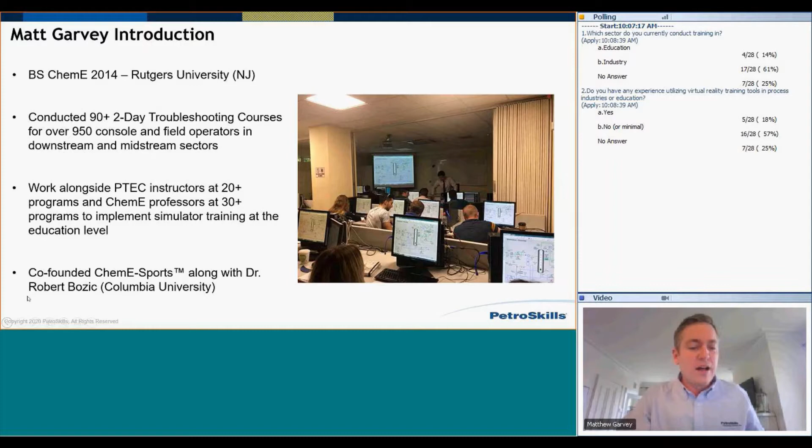And this past year, we had 34 teams compete. We actually had a team from Sri Lanka win. The year previous, it was a team from Nigeria. And the year before that, it was a Louisiana team - schools like Texas A&M, University of Virginia, and then kind of around the world. I'll talk about that ChemE-Sports experience a bit when I talk about how we can build some of this into more interactive exercises.

But just to round out the background on our group, what we focus on is operator training using 3 parts. What I'll focus more on is this actual VR part. Historically, my background, I did console operator training. We worked with a DCS. Well, more and more the last 3 to 4 years, we've been using different virtual reality systems.

Again, I actually produced the DCS. So I almost look at it more as a client when I look at virtual reality, because this is not things that I produce. So I've worked with different systems, and I think I have more perhaps your standpoint when evaluating these systems, where I actually produce the DCS for the simulator.

In addition to that, we have a methodology. I won't go in much detail about that other than to give us a framework to talk about what types of training we could do. So again, I'll talk about our simulator, our methodology, but you'll see very quickly, it's very similar to probably whatever simulation you're using, if any.

And the methodology, I'm sure, is very similar to the type of framework you have for your operator training. In fact, the 5 steps of process operator training I'm going to talk about are identification. And what I'm going to do is relate where VR is at these 5 steps. So identification is when you first have an operator coming on board - okay, where's all the equipment? What's its purpose? How do we relate a P&ID, a console perhaps, in the actual field?

Normal operations - okay, how do we expect things to respond? Maybe it's how do we follow a standard procedure for swapping pumps. Startup and shutdown, self-explanatory. And then, of course, troubleshooting is the big one. And then we also group in - not everyone includes this in their overall methodology - what we call operating strategies or optimization, kind of what are the limits of our different pieces of equipment, how do we maintain product quality, different types of this, and it starts to get system dependent.

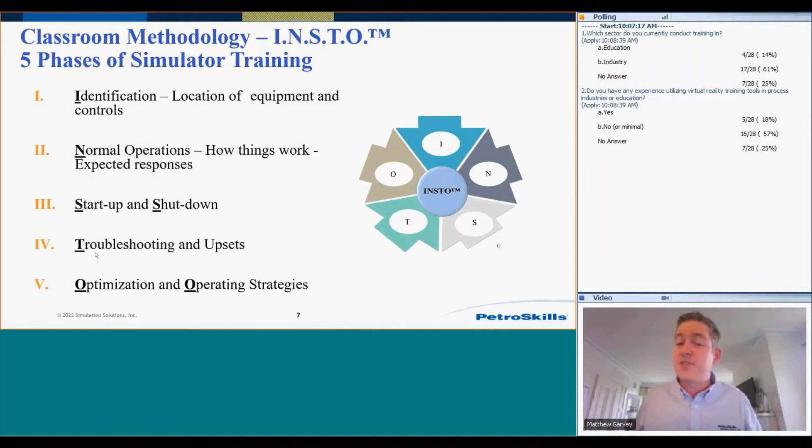Just the last slide I'll give on our general methodology, and I do think this is important, and it applies to our virtual training as well.

When we approach operator training, our main objective in any content we develop, deliver, or advise potential clients on is really teaching operators how to think.

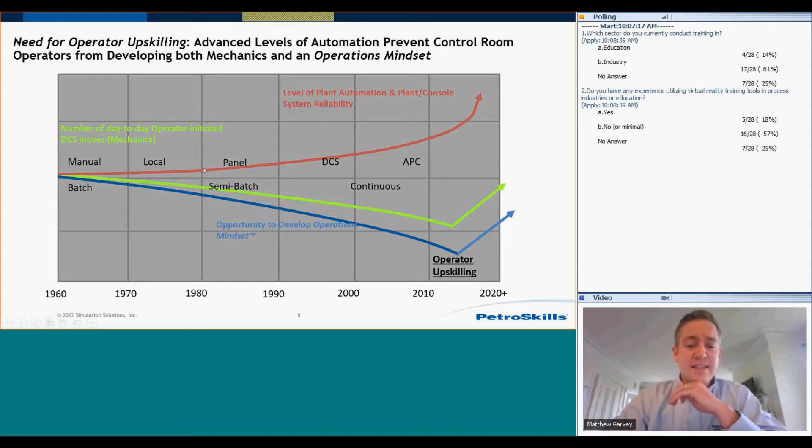I like to show this slide here, looking at the industry. I'll use a downstream example, but I think it's analogous across chemical process industries. The actual technologies, for the most part, have gotten to a certain point where distillation is distillation, catalytic cracking is catalytic cracking. The actual advancements now, expansion projects, are mainly to deal with environmental concerns and things like this. The actual processes aren't changing all that much.

What's truly changing is the advanced process control, and it seems there really is no end in sight for this. And that's a good thing, right? It makes our plants more reliable, safer, more efficient.

But as we get into this world of advanced process control, what we see working with these operators day to day is they can feel separated from the process. They might be doing less day-to-day operator-initiated board moves, this green line. And even more importantly, what we're seeing is their time to actually develop this operations mindset, which I'll define in just a moment, is also decreasing.

So when your group has an opportunity to do offline training, which is what we may use virtual reality for, we think it's really important to not only use these tools for things like here's where this piece of equipment is in the plant, here's how you follow the standard procedure, but leverage these tools to start getting operators to think about why they're doing what they're doing.

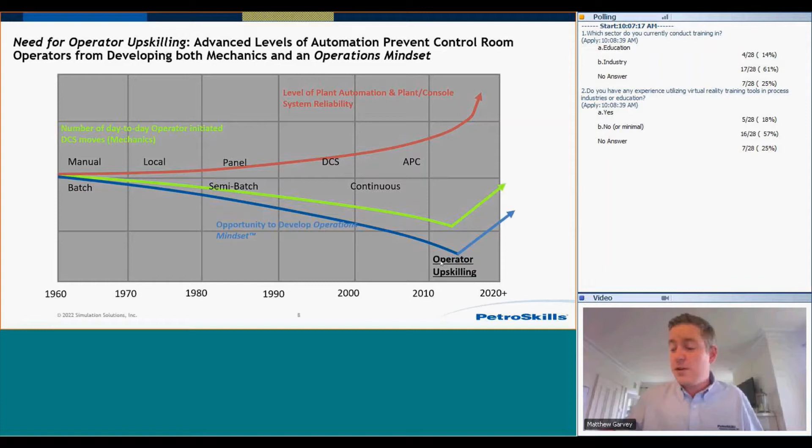I really believe there's an opportunity here for what we call operator upskilling, but your site might call it something else. This is the mindset of the operator. We believe virtual reality could really be utilized for this type of skill set.

So just to define those a bit further - mechanics, what are we talking about? Both mechanics and mindset are important; we're not saying you only need to focus on the mindset. But these are things like ability to work within operating procedures. You give a field operator a procedure for how you are going to switch from pump A to pump B, and they can complete that procedure as it's written. They can stay within the operations limits.

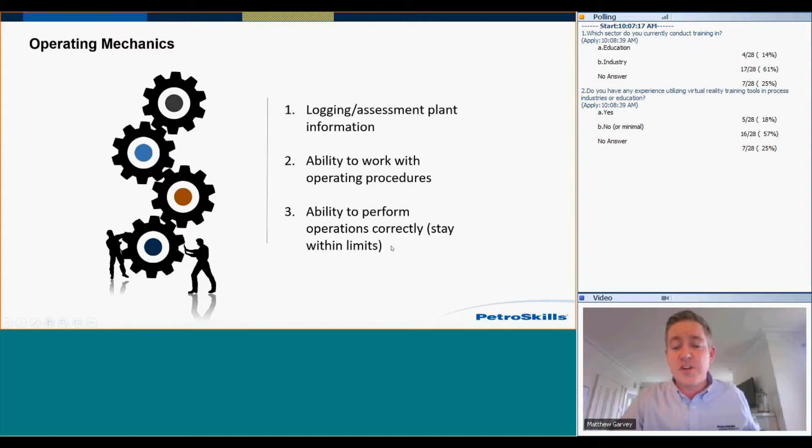But when we look at mindset, this is a higher level skill. This is the ability to analyze reasons for events and upsets. So you're swinging pump A to B, and now something deviates from the procedure a bit - are you just blatantly following step 1, 2, 3, 4 with your head down? Or do you have an expectation of results as you're moving? Do you have an ability to prioritize and deal with events and their causes, and to gather extra information to determine magnitudes of upsets?

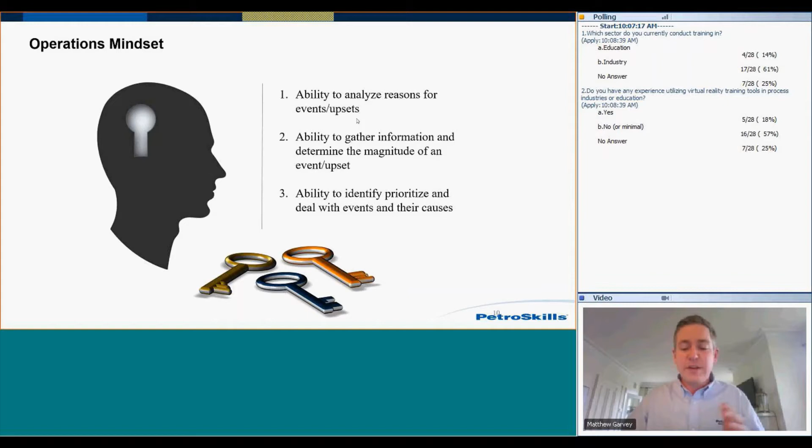We believe if you apply both of these, and approach the training with these tools for the mindset as well, operators can stay proactive. They're developing both this mechanic and mindset skill. What we tell operators, not as a joke, is: you are running the plant - that's where you want to be. If you're simply reactive, just applying exactly what's provided to you, you could be caught behind the plant, and it's a constant struggle. So we're trying to promote skills that are really about how operators think.

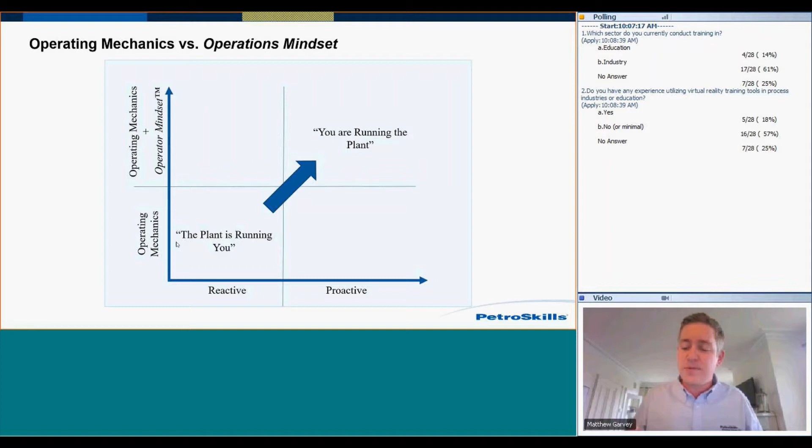And I think there's a great opportunity to do this with some of the virtual training out there. So that's just a bit of background. Here's my summation - I'll really just talk about one slide here about what I see as current status. And I see there's some really, really cool training out there.

What I think is the current utilization of virtual reality—and this isn't for every operating company in the world—is that VR tools do a very good job at these first 3 steps we've defined. For identification, there are vendors out there taking 3D cameras of your site, tagging every piece of equipment, and then an operator can go in with Oculus glasses and be given a task, like go find valve FCV 103. The operator can relate it to a P&ID, go there, and physically see exactly what that valve is. That's extremely powerful, and a great application for virtual reality.

What we'll see as well is things that are procedural, like startup and shutdown, which I'll group together. For example, we're going to work on this section of the plant startup: turn this valve X amount, block this in, go ahead and start the P120B motor. It's very procedural, and very valuable because when the operator goes into the field, they've already seen this equipment before, limiting the amount of error for things like identifying an incorrect piece of equipment.

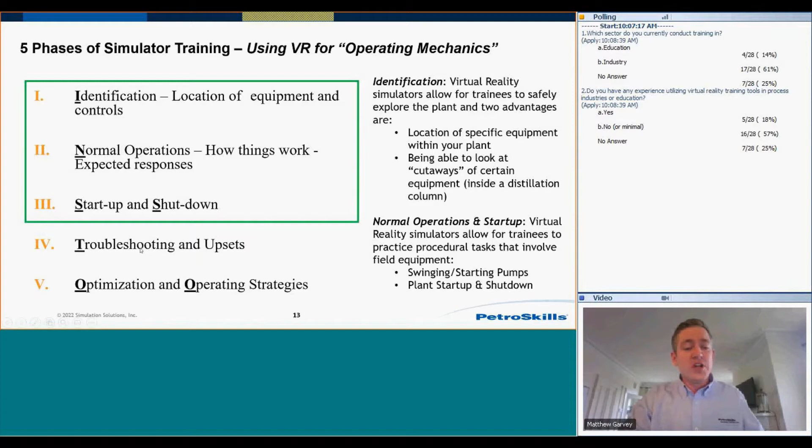To summarize, currently what I see with virtual reality is a very strong application for those using it—it could certainly justify the cost for identification, normal operations, and things like startup and shutdown, very procedural areas. What I want to do now is more calmly walk through where we think you can apply some of these tools for things like troubleshooting and upset conditions.

What I'll do is actually go ahead and launch one version. The purpose of this workshop is not to just show one certain process simulator—I truly believe, as I go through this and launch it, that you could apply these different techniques to any simulator you might currently be using. It's just the one that I can currently use.

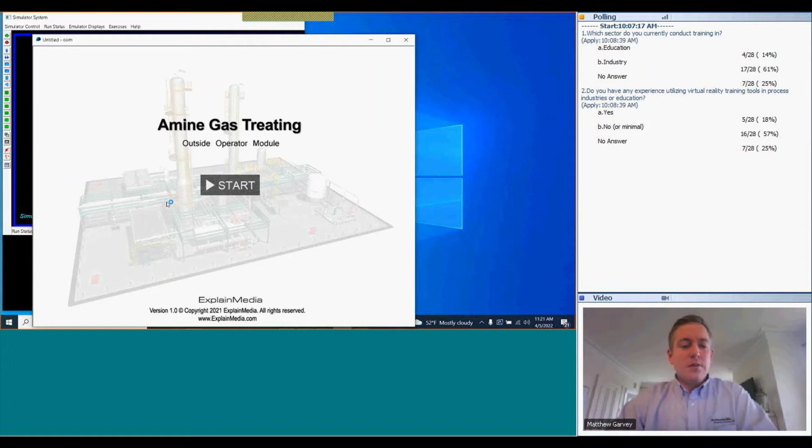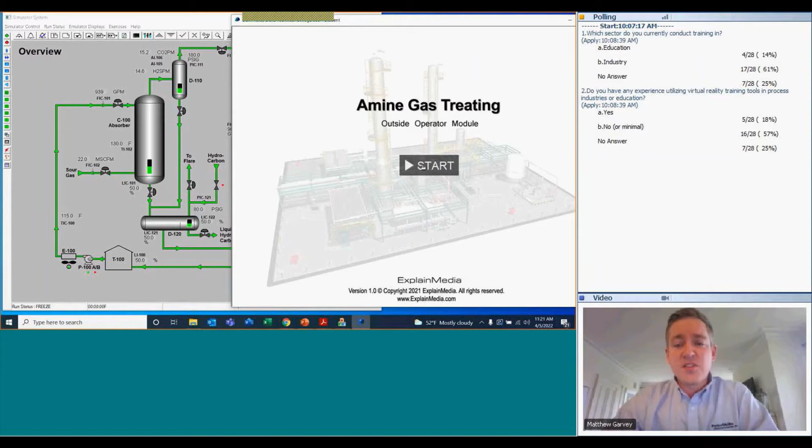So what I'm going to do is go ahead with a simple absorber and stripper process here. This I'll call the DCS, Distributed Control System, and this is what I'm currently calling our VR outside operator. A couple notes: right now I am running both of these windows from the same PC, and I'm not using any sort of virtual reality goggles—this is all standard PC-based.

These are the same types of troubleshooting exercises that I think could be even enhanced. Number one, which is the big one, is using the same system on 2 different machines—that way you have team training, with 2 different students or operators in 2 different locations working on the same dynamic process. I'm not showing that right now since I can only show 1 computer, but I think that's a big benefit and something you should keep in mind.

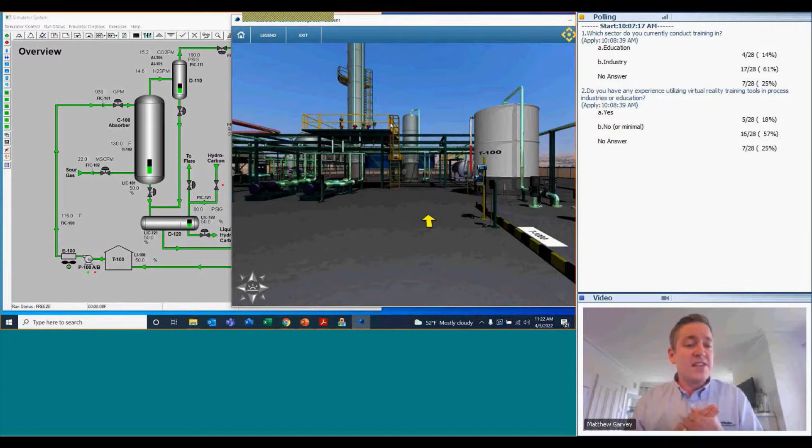And then the other aspect is as we start to get into more advanced technologies. So this right here—I'll make this one full screen—this is our virtual plant, right?

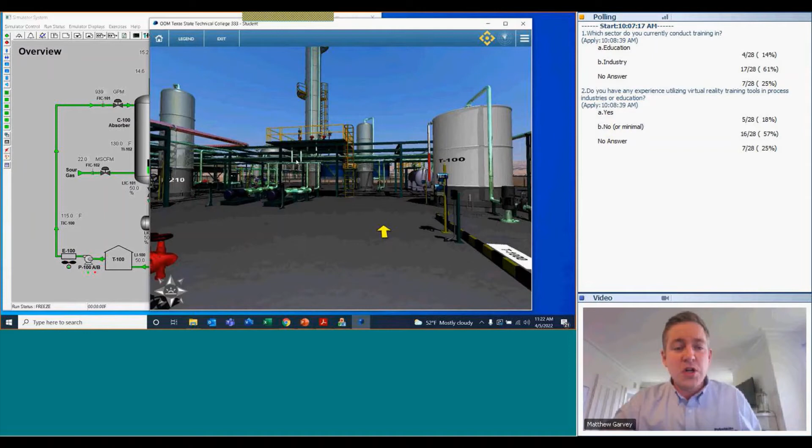We can see our absorber and our stripper, and we can walk around and take a 360 view. In the previous slide, when we talked about identification, we could come look inside the absorber to see what it looks like. We could go ahead and do a procedure where we start up pumps.

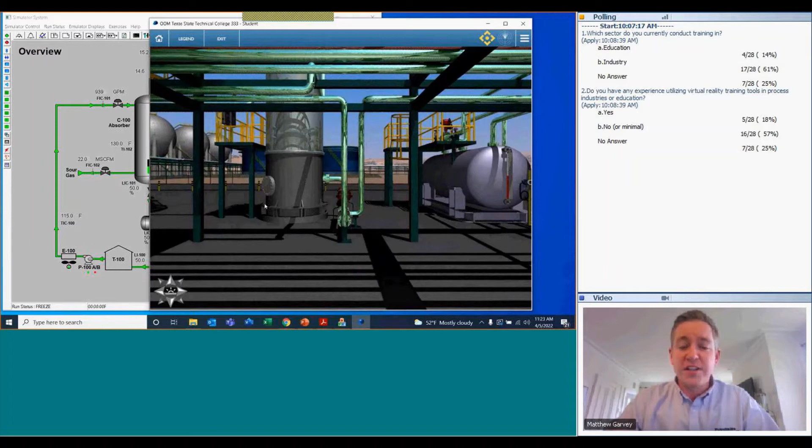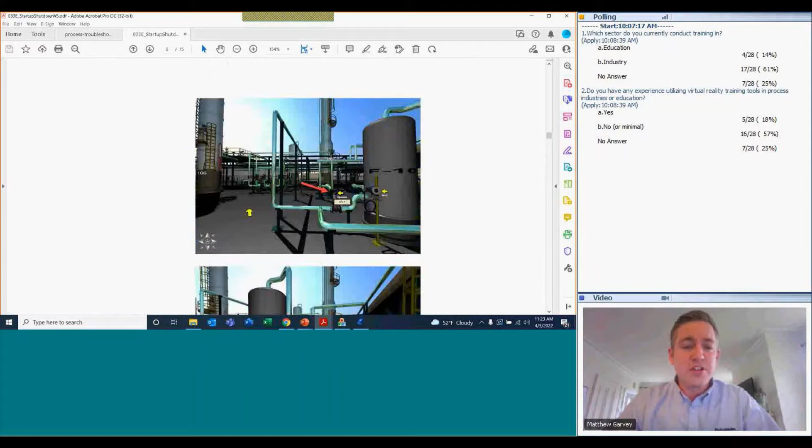Because I have 45 minutes of your time, I'm not going to go through those. I'm going to go through what I think is more interesting with the troubleshooting. But just to give you an example, you can imagine a situation as I come through the system where you're conducting team startup, and that would look something like this. I'll just pull up what we do, and go to a random part in this startup procedure. This is good, where you're going to begin certain circulation in the process.

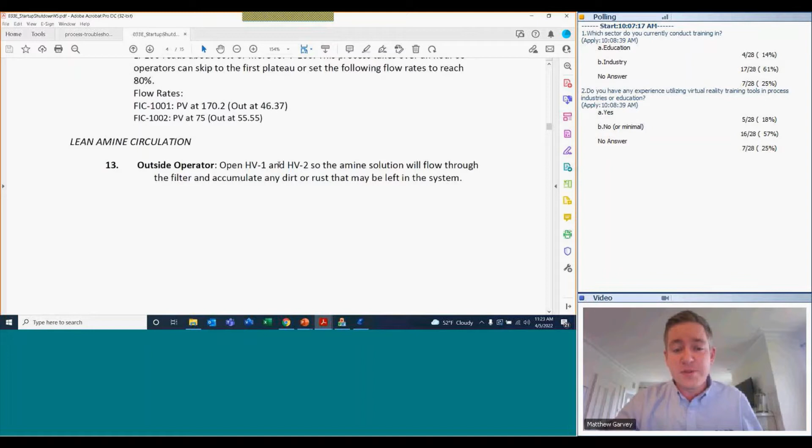The key thing I'm trying to show here is there's functions for the outside operator using the VR. So they're opening some sort of valving. They can go in the field, actually find that valving, begin to open it. And then the console operator at the same time is working things from the DCS. I see this as a strong application from most of the VR that's out there right now. So right here, we're already attacking the team training, which of course, startup is a team exercise.

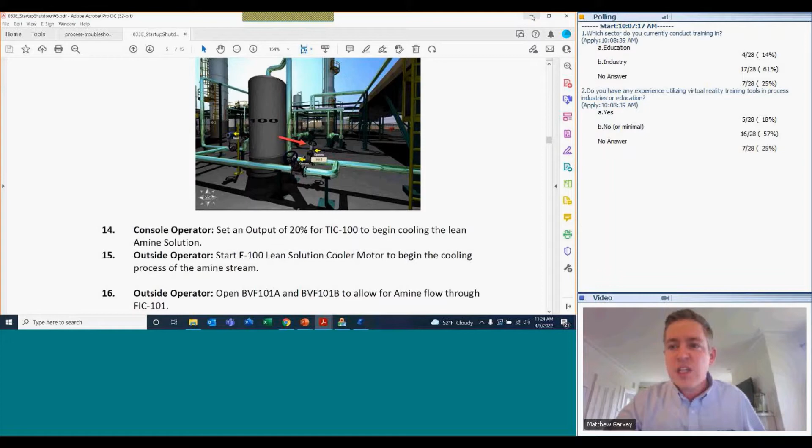I'm not going to focus on this so much because I think people are doing a good job with it already. What I want to focus on, and I'll slowly use this system to walk around to a specific piece of equipment when we do some of this troubleshooting, is I want to go ahead and just show you maybe 2 exercises. The focus I'm going to put here regarding troubleshooting is how do you incorporate that virtual piece?

Sometimes what I'll see, and I'm not saying everyone does this, is an investment in virtual reality at the education level. It's a very neat thing to attract students to the program. Students go in for a lesson, they're able to walk around and say, oh wow, that's what a distillation column looks like. And that is powerful. But after that initial kind of wow factor, maybe they put the goggles on and now they're looking at a pump system.

Or at the plant, perhaps your outside operators during their onboarding program, you can more efficiently identify the process to them, convey where equipment is. But again, do you still use that tool as you're going through more of your developmental training? So what I'm going to focus on is, I know a lot of people use process simulators, so more the DCS to conduct troubleshooting and things like this. Let's talk about how you can meaningfully utilize the VR there as well.

So just to use one example for this, to start, I'm just going to show this is just one of our troubleshooting styles of exercises, and I could talk for quite a bit on this, but instead I'll focus how we use the outside operator. So this is something we'll go through the troubleshooting course. We call it a troubleshooting methodology.

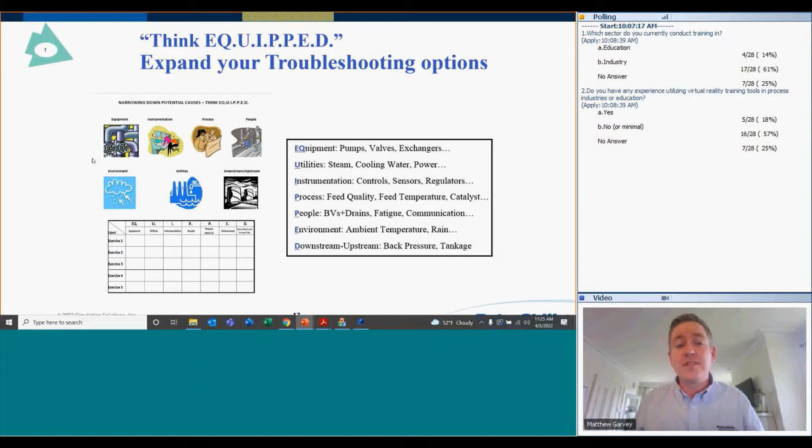We call it Think Equipped, and the idea is that Equipped is an acronym. If I go to the next slide, you can see it in a fishbone diagram. What we do with console and field operators is we'll put in short little upsets into the simulator and say, okay, don't worry about fixing the issue right now. We want to practice the skill of troubleshooting. So what we want you to do is actually go through these specific categories, and I'll show you what the worksheet looks like in a second.

We want you to go through, use equipment, utilities, process, etc. And we just want you to identify 3 to 5 to 7 potential bad actors. So what are the potential reasons for this failure you're seeing? Instead of just approaching it where the operator comes on the simulator, something breaks and they just have to scramble to try to fix it, we try to break troubleshooting into its parts. We say, don't worry about fixing anything right now. Let's just practice that skill of developing a list of potential failures. And then, of course, we'll eventually get to the corrective steps and identifying and putting it all together.

I think this is a great style of exercise to start working VR in, and it's something I've done the last couple of years here. So I'm going to go through a sample exercise, but I do want to show the worksheet. Then what I'll really highlight is where we can use the outside operator, and give you some of our evolution on how I've done this, because talking about how I've integrated VR will give you an idea of how you can too.

Previously, what we would do is put a failure in the system. I'll show one in a second. We just had these steps 1, 2, and 4. I'll try to make that clear here, where the operator, the trainee, the student goes in and writes down a few observations about what they see changing in the system.

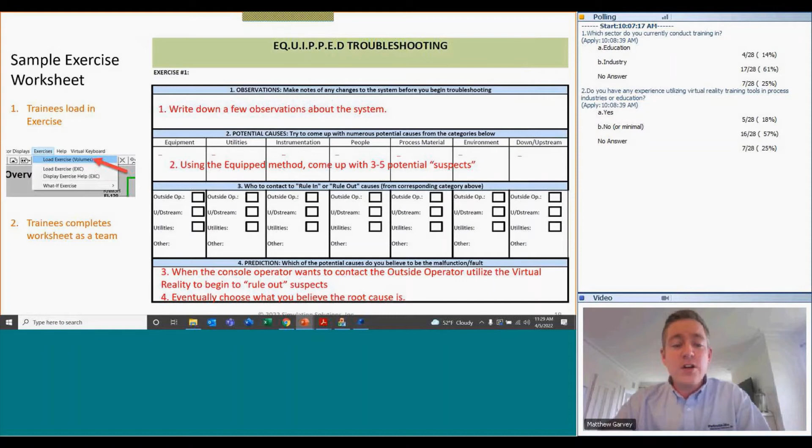So this is one example of how we did it, and I can just show perhaps an exercise would be better than just a bunch of slides. I'll show an example I took from an actual class and some of the feedback we got.

The way the trainees would do this is they would load in an exercise—I'll call it think equip number 1. They'd go through quite a number of these, and I'm going to turn off my alarms... oh good, already off. The point of this is that very quickly something begins to fail.

You've all looked at the system maybe on my screen for a total of 30 seconds now, so of course I don't really have time to walk through it, but you can see there's an alarm here, right? It looks like there's an alarm, looks like a feed flow issue. If I move forward on the graphic, we can see a little more clearly here.

This is our lean amine absorber—basically an amine gas treating unit. We're bringing in a lean amine solution here, bringing in sour gas, and the overall goal is to absorb most of the H2S or CO2 from the sour gas. Then of course we have a stripper on the back end to clean it up.

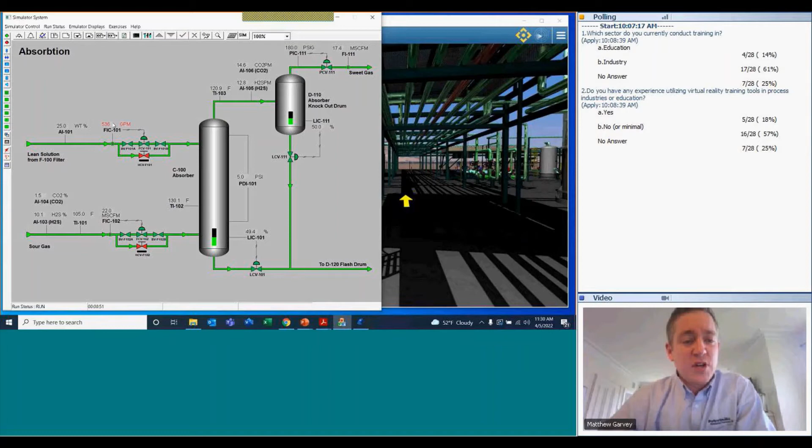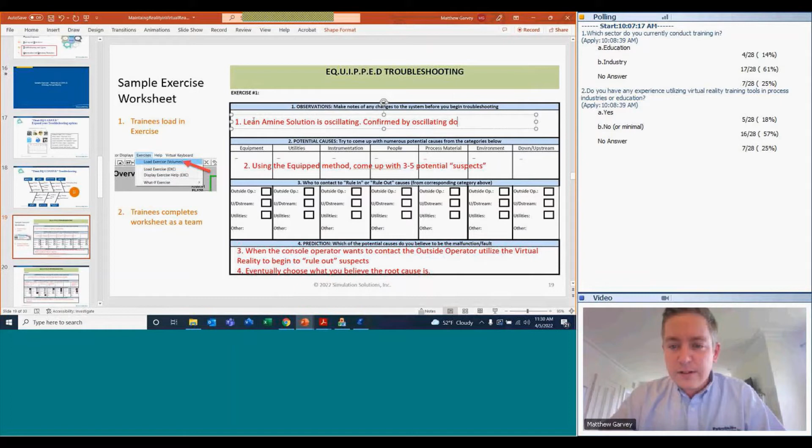Without going too in depth, where we'd start this exercise is the console operator would start to identify what he or she sees. The idea is they'd be filling out a written worksheet—I have an answer key, but I can show it dynamically. They'd note, the lean amine solution is oscillating. Normally I'd ask the audience to answer these, but it's confirmed by oscillating downstream variables. What do I mean by that?

Very quickly, this seems to be oscillating. Let's just pick any old variable, temperature. There also seems to be some disturbance here, right?

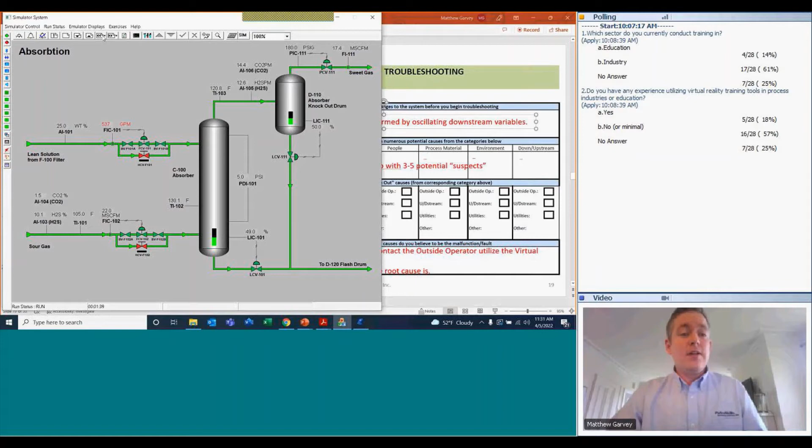So we truly believe that flow begins to oscillate. Now what we do in two parts: we say, okay, console operator, take out your P&ID. What is the different equipment that you would like to begin thinking could be a bad actor here? I'll pull up results from a class we've had before.

What we'll see is they'll rather quickly talk about it, and the point isn't the tricky part there. Experienced console operators, or people getting it quickly, will be able to fill this out rather quickly. They'll talk about, well, perhaps it could be the control valve, there's a pump upstream perhaps that's cavitating, there's a filter system, filter clogged.

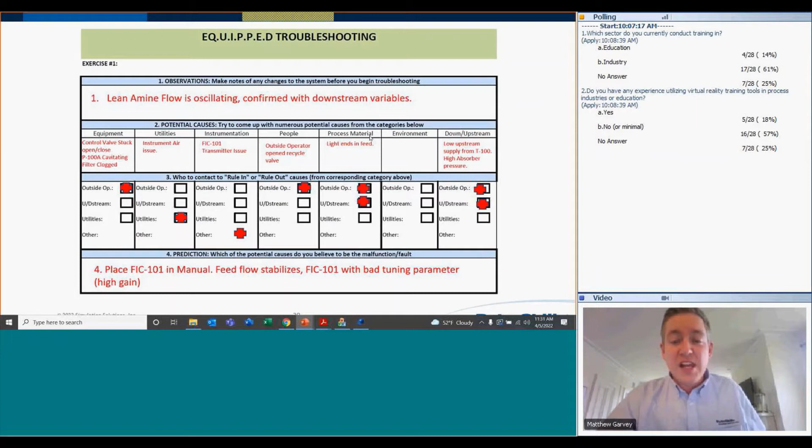And here's the key thing: we say, okay, who are you going to contact? Well, the outside operator. In the past for this exercise, there was no outside operator, it was just, okay, we'll contact him or her, and then we'll keep moving along here. Maybe it's an instrument air issue. Maybe there's light ends in your feedstock causing that pump to cavitate. Maybe you have low upstream supply from T100, right?

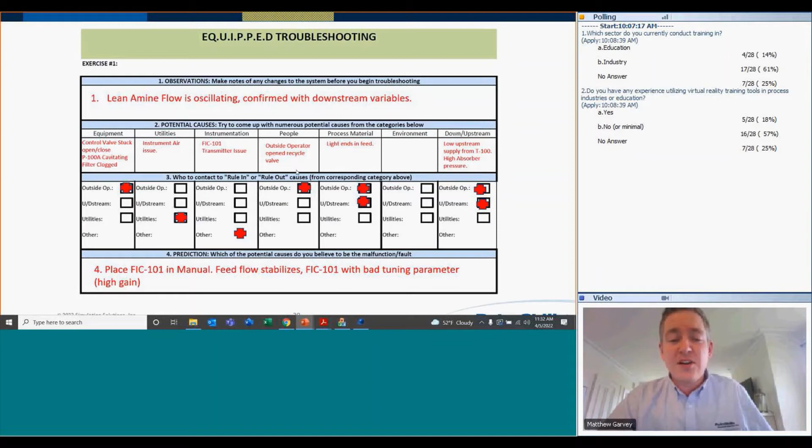So let's just focus on that one, and then I can show you the next one. So who would you contact? Outside operator is going to be in a lot of these categories, it's going to be the outside operator. Now what you have, we'll do it over radios, we'll try to get people in a different room.

But okay, we've gone through eight minutes. The console operators identified things. While they're doing this, they are now calling the outside operator who's on his or her simulator with the VR, and let's just focus on maybe we think this is oscillating because our pump here, P100, is cavitating.

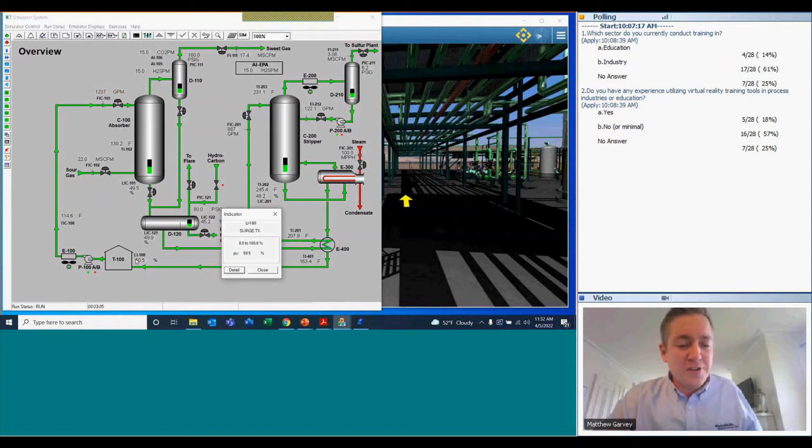And why is that? Maybe we have low supply in T100. We see LI100 here, so we get from the board an indication that the level, it's not low, but it gives us a good opportunity to say, okay, let's start checking variables. If some of you in the webinar today are more operations focused, you're probably going, that's not the most realistic thing, there's probably other stuff you want to troubleshoot.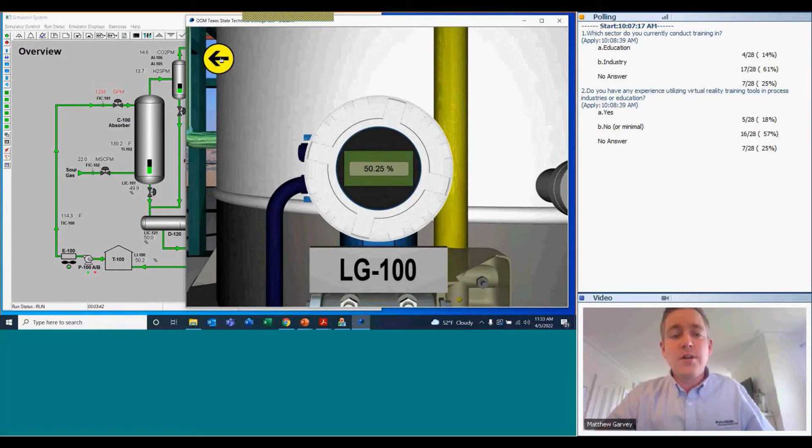So the outside operator, here's that T100. Again, we've gone through all the identification exercise, so they're familiar with the system. But now imagine a communication system where they can both check a sight gauge and eventually go, okay, no, the levels match up with what you see on the console. Okay, check it off, let's keep working through our list, right?

So eventually what they might get to is, okay, we might want to check the pump status, so we could go check the amps on the pumps and different things like this. But what I'll do instead is just jump, let's go check the control valve itself. I'm just going to parachute in because it'll be faster for the demo—they'd be walking around. So what we're looking at now is our filter.

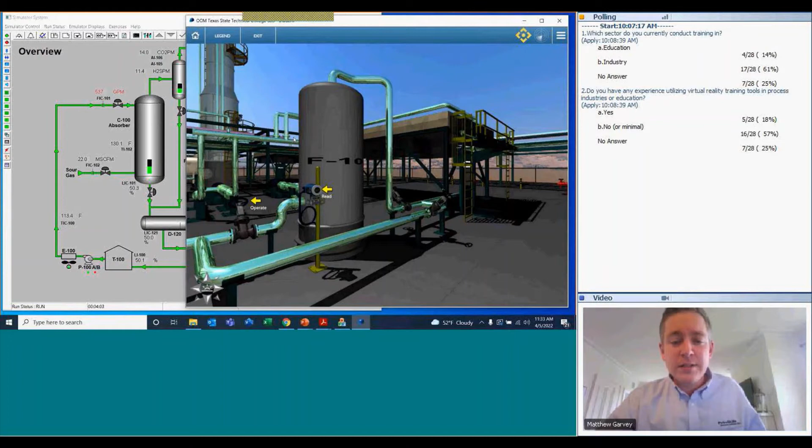And here's our control valve. So now what the outside operator can do is actually go ahead and look at the control valve, and they can come in and see that the valve itself is moving up and down, as well as the air to the valve. So the outside operator can start relaying that information.

If I go this long for a demo in a class, one of the operators is screaming at me, just put the valve in manual already, right? Because they start to deduce what it is. But what I'm trying to show here is it gives us an opportunity where we can put in different instrumentation, both on a DCS as well as in the field, so you can start to build this team troubleshooting.

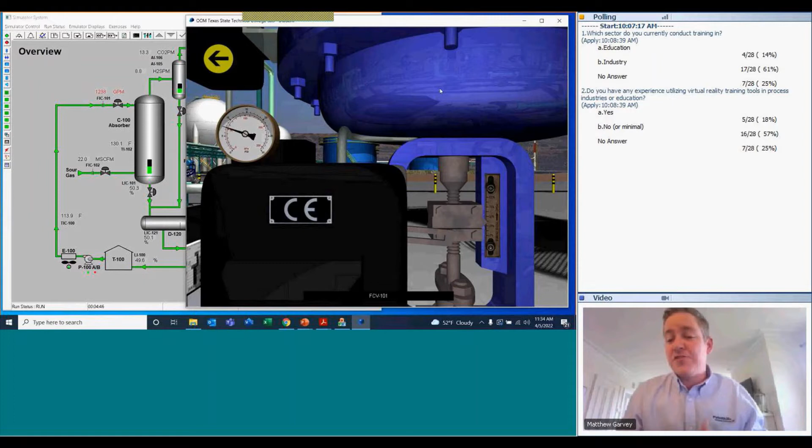And I work with the same pairs throughout. So they're going through and now they're saying, okay, check this piece of equipment. And where we really want to get it to, and where I think it's really powerful, is when the field operator starts contributing information the console operator didn't ask for. I think that's a lot of the training we're getting to: if you can have your field operator using VR start to see more of this troubleshooting process, they may start offering information that the console operator is not asking for that might help get to a solution faster.

Eventually, for corrective steps, if it was an issue with the control valve that couldn't be fixed from the board, the operator can come in and you can kind of see a block valve bypass scheme. Then you could actually follow a procedure, just like the startup, where we're going to block in the control valve, work through the bypass, and get the unit back online.

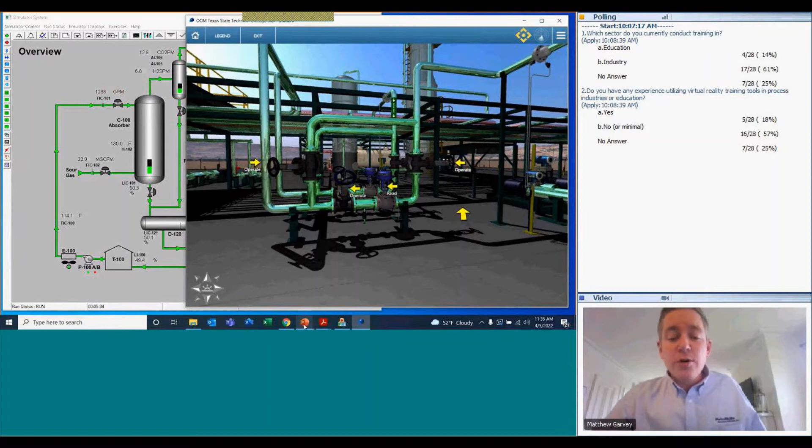The point I'm trying to show isn't just about any one tool. Whatever previous troubleshooting you were doing, whether pen and paper or just a simulator like this, make it team training. Start adding in different tasks for the outside operator to use the virtual reality, and you'll get more and more out of this tool.

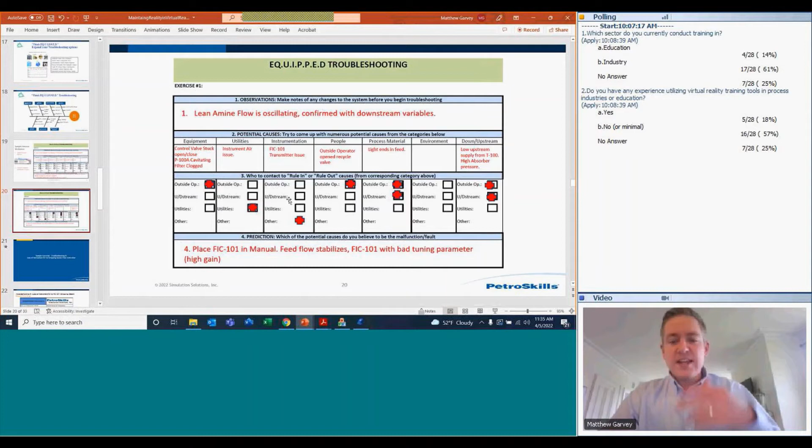We'll go through many scenarios like this, and eventually they could place it in manual and stabilize it. But this Think Equipped exercise has lended itself to VR quite a bit, because it's really about gathering information and weighing potential failures and probability. By having two points for information, that instrumentation duplication between console and field, we've found this helps build team training.

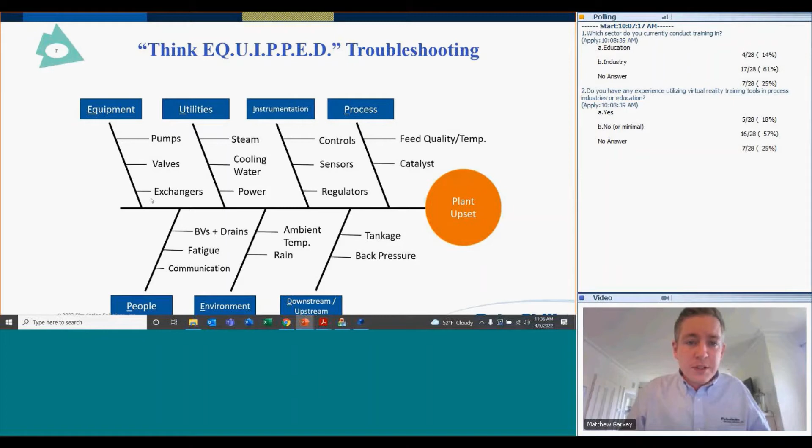Feel free to use any of this, apply it back to your own system if you think something here is catchy or useful for training. And just because of time, I'll show one more example, and then I'll certainly be on time here.

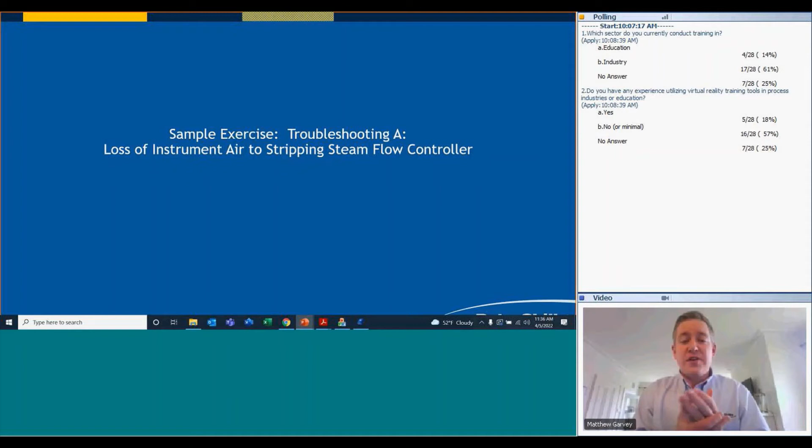What's another way we try to use virtual reality at the operator or education level? I could talk about our methodology for quite a bit, but instead I'll quickly explain this because I want to focus more on how we've modified it to use virtual reality. So here's another type of troubleshooting.

In this one we tell the team the failure upfront. We tell them, okay, we're going to look at a system where you're going to lose instrument air to our stripping steam flow controller, using the same absorber stripper section. You can think of any failure you want to put here.

Before, when we were just doing console training with the DCS, we would tell the console operator - this is almost like a hazard analysis exercise - what steps are you going to take to confirm the issue? How are you going to mitigate it? How can you buy yourself time before the eventual correction, if there is one, outside of a safe shutdown? And how will you eventually correct it?

This one was rather simple to apply to virtual reality. We just asked, what is the outside operator going to do? How are they going to confirm the failure from the field? Applying virtual reality actually becomes simple because it's closer to real life. If you've just used DCS simulation before, it's like suddenly having this extra tool that lets you apply a lot more realism.

From the field, how are you going to confirm it? How are you going to mitigate and correct it? Then, of course, we go through safety concerns and get to an eventual correction step.

To show some of this dynamic process, the teams would fill this out and make their predictions about what they think is going to happen. After that discussion, which isn't my main focus here, they'll actually go apply a fix, working in teams, working with both parts of the plant.

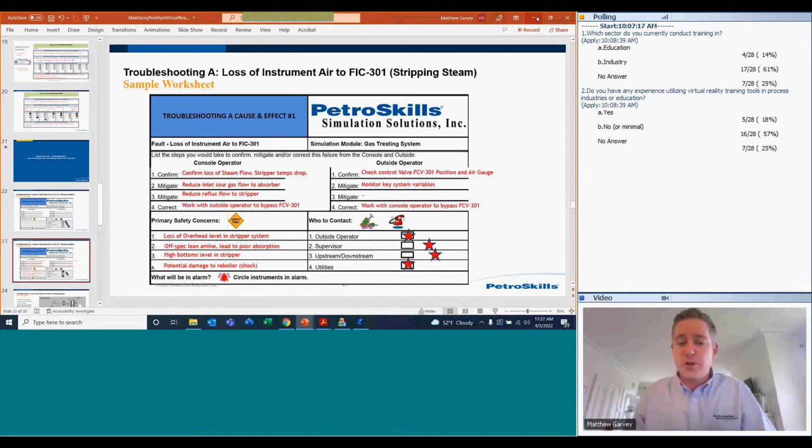The way we'd run this is they'd come in and load in an exercise - loss of air to FIC-301. I'll go to that one in a second here.

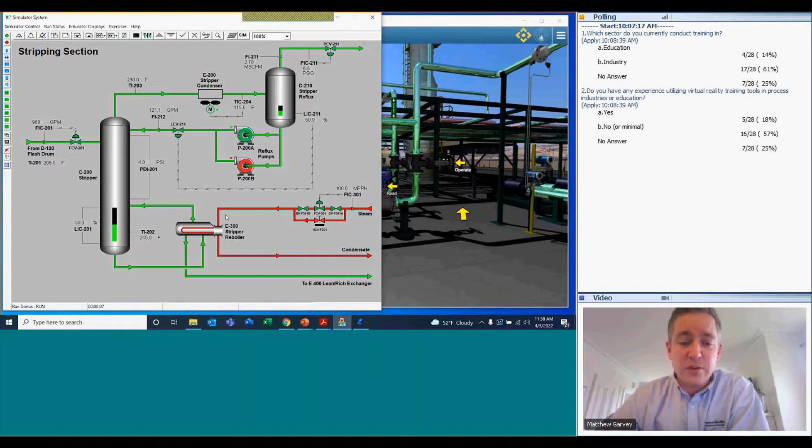I'm just going to skip ahead to our stripping section. So this is our control valve, putting steam down to the reboiler. What's going to happen, I think at the 15-second mark, if not I'll force it to go in, is we're going to lose air to this controller. There we go, okay.

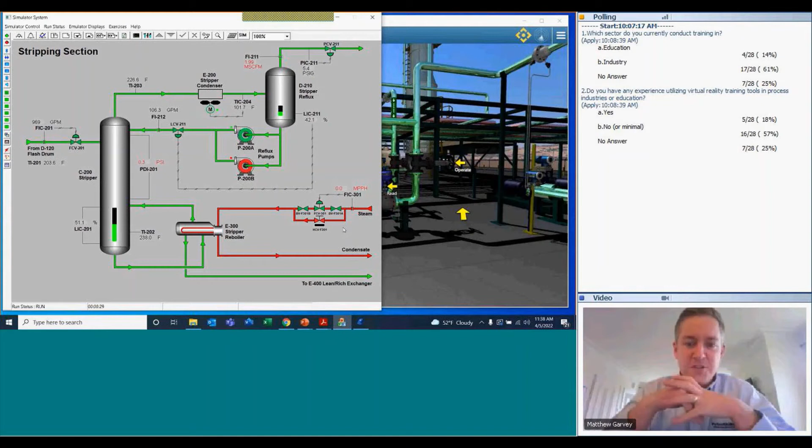So now what we say is, okay, again, it starts with the console operator. This is if you're doing team training. If people want to know, I can talk about how we do it with just outside operators or just console operators. But if we're doing team training, it starts with the console.

Very quickly they realize something's wrong, and now it's, okay, I need you to go check out what's happening over by the stripping steam. So the field operator is familiar with all this. I'm just going to dive in again because I don't want to spend time walking around the plant. There we go.

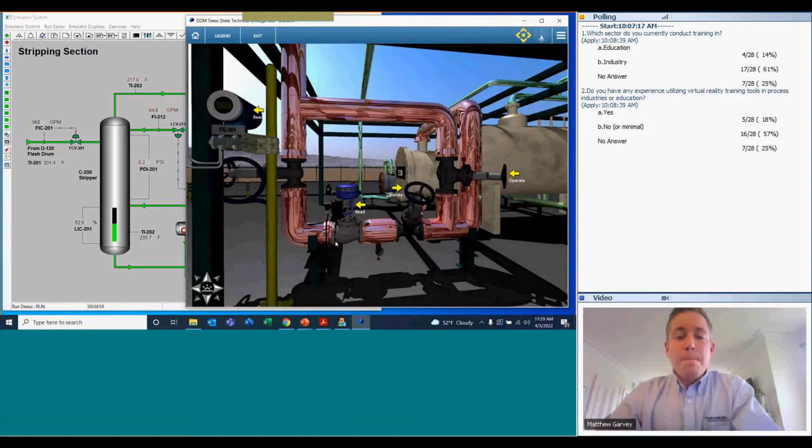Here is the flow gauge associated with my stripping steam, and I can see it truly is 0. So we can rule out that that's a faulty reading from the console.

Now, when we first see this, it doesn't shout out that we lost air to the valve. We know we don't have flow, but we could be thinking it's loss of supply. Maybe the boiler's tripped out. Maybe it's the physical valve failed shut. Maybe it's a bad indicator, like I said.

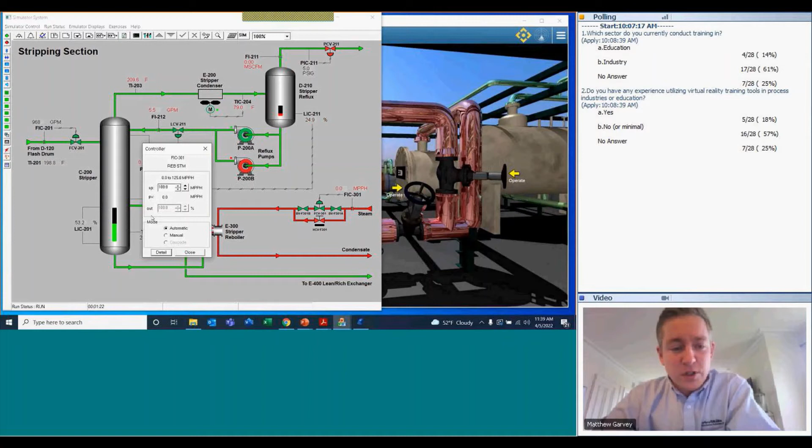And from the console, if you're currently using this, you can see the output signal from the controller to the valve is 100%, but the PV is 0. I could try putting it in manual and changing this, and I'm not getting any flow. So I'm a bit concerned because this green animation here is just from the actual controller output.

So what I want to do is ask my outside operator to go look at the valve. And then, while from the console it looks like the valve's open, from the field, the actual valve position, we can see it's 0 here. And we can see we've lost any sort of air coming to the control valve, so it's in its fail-safe position, or in this case, closed.

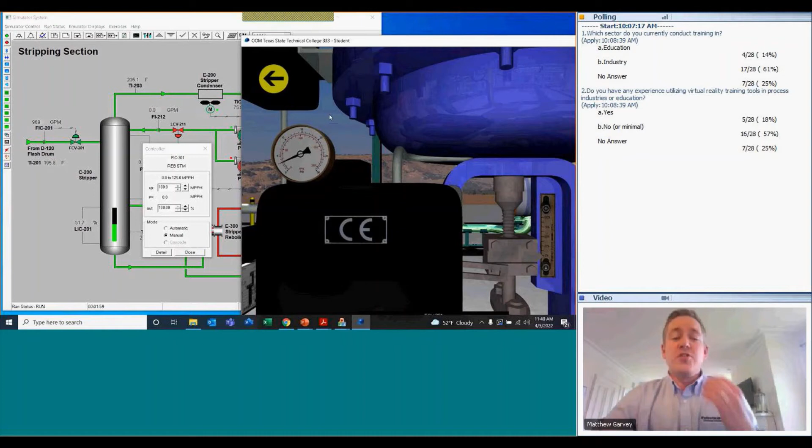So this helps both with the troubleshooting. It allows us the opportunity to look at it and start to analyze the system. But then, of course, I'll just go quickly here, but it allows us a chance where we can actually go ahead and block out that control valve.

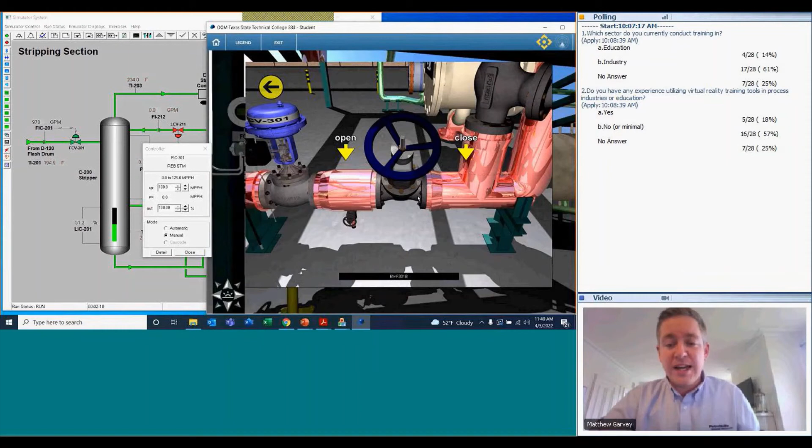Let's go over here so I get both block valves. Yeah, good enough.

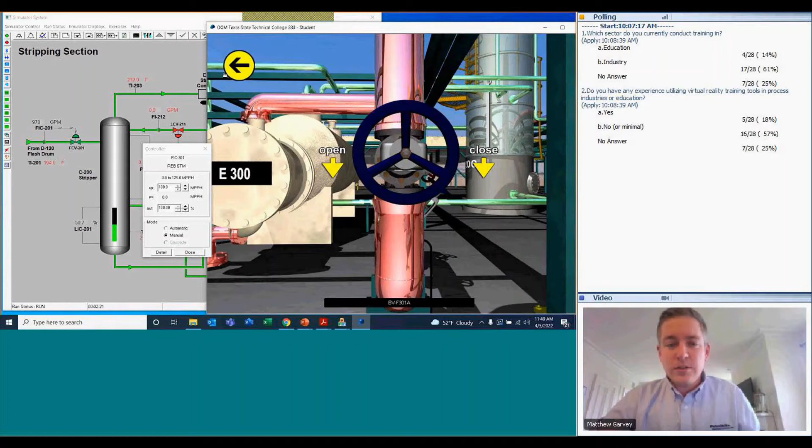And again, following procedure, it would be faster or slower than this. But eventually, imagine a console operator communicating to the field operator about starting to open this bypass, if we can keep the system online. So the outside operator can come in and manipulate valves.

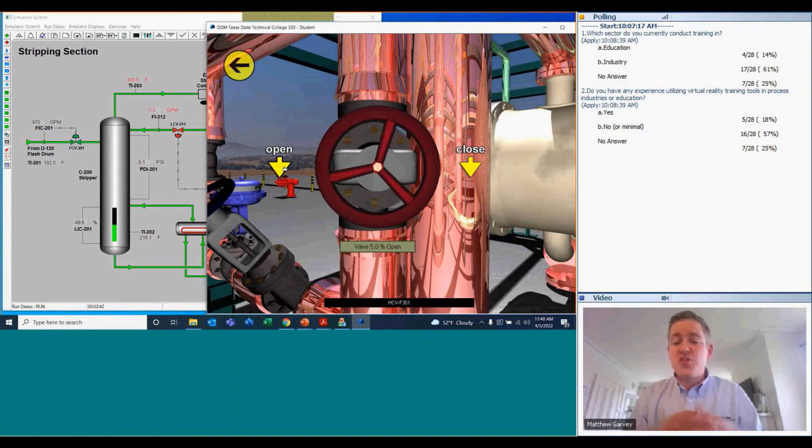Again, I'm doing a PC base. We're clicking things. You might have more advanced technologies where you can actually turn your hands, right? I've seen some cool stuff like that. Same general functionality.

And they can come in and open this, and of course they'd work together as a team. They'd see they reestablish flow. The console operator will probably take the controller, put it in manual, and just shut it, so they're clear that they're working through the bypass.

And then we could talk about eventually how we fix that and who we have to call, and things like that. But again, it's this idea of working between teams. It's the idea of, I bought this tool, or I'm looking to buy this tool, and it's going to be used for BOT training, or it's going to be used for an expansion project, and we're going to be able to show everyone where all the equipment is.

And our argument is, that's great. If that gets the project justified, awesome. But if you still have access to the tool, if you apply some higher-level troubleshooting concepts, some different techniques, you're going to be able to get a lot more out of the tool itself.

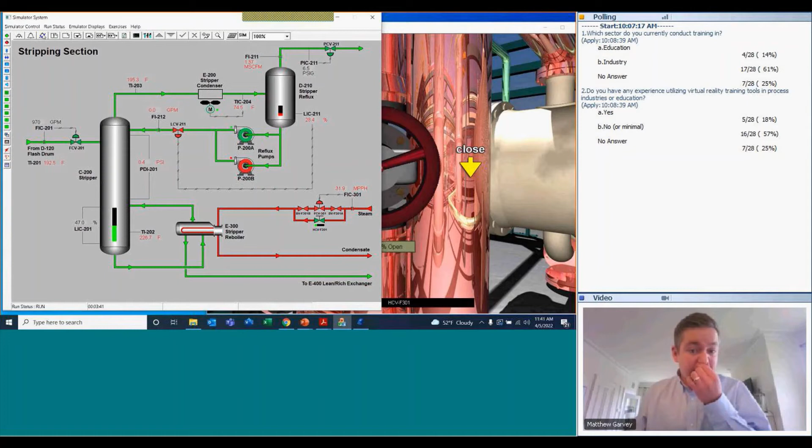And that's kind of just my view in the last 6 months, and I know some companies are doing a phenomenal job, this isn't everyone. Some, I know for example, I read a paper from ExxonMobil. They do quite a bit of troubleshooting with their VR systems. It's really, really neat stuff.

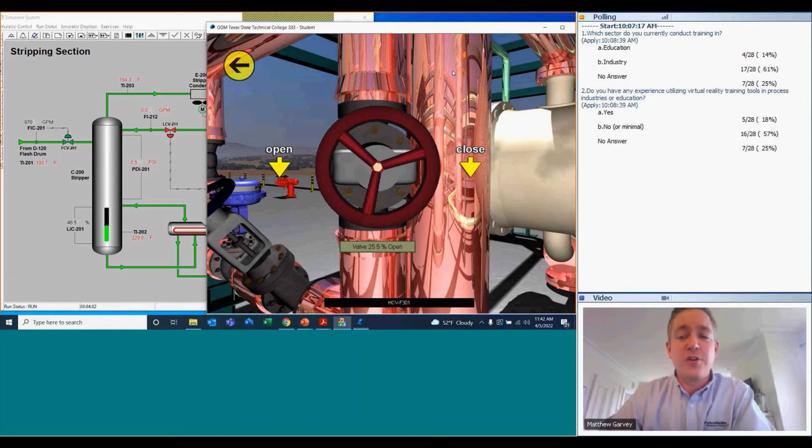So it's not that we're the first ones to think of this, it's just that it doesn't always happen. And if you're starting to look at some of these VR tools, I think focusing on troubleshooting, and not just startup following procedures, could add quite a bit of value to your operators.

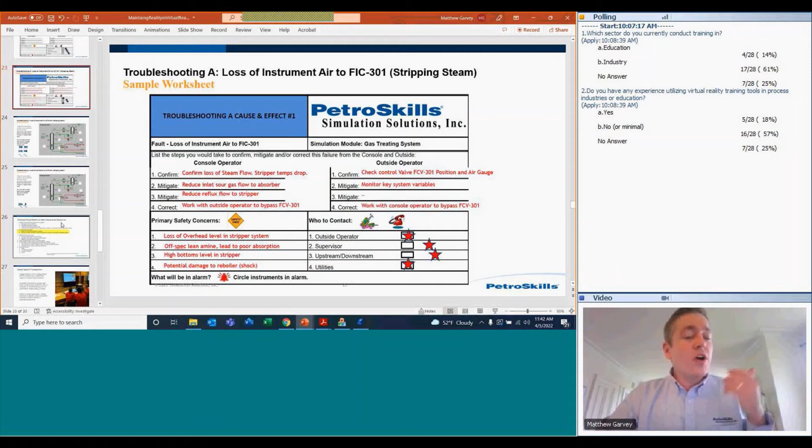Okay, so they go through it, and because I know we have some education clients in here, I just wanted to highlight one thing. So that's 2 styles, and I'll end here in 3 minutes.

I work with quite a bit of education clients, and the whole idea of how do we tackle team training, soft skills, communication? Everyone can find coverage for it, right? They work in a group together on a project, or work on a paper together and give a presentation about their results in the lab.

I don't mean to demean that, but if you have a tool meant to mimic the teamwork that happens on site, then these are, for those familiar, the North American Process Technology Alliance objectives for the troubleshooting course. This is their overall troubleshooting methodology, and these are getting to the objectives of what has to be done for a NAPTA university.

Very similar to ABET or the European standards, but everyone's got these standards. Right here, when you're mapping out what you're doing, how you're assessing communication of problem, determining what communication is needed, but communicating with team members - well, now we are doing this actively. We could cover it in different ways, but now we are covering it the same way they're doing in real life. Your industry sponsors, of course, are going to like it. A lot of the instructors come from industry, so it just gives you an opportunity to touch on that again.

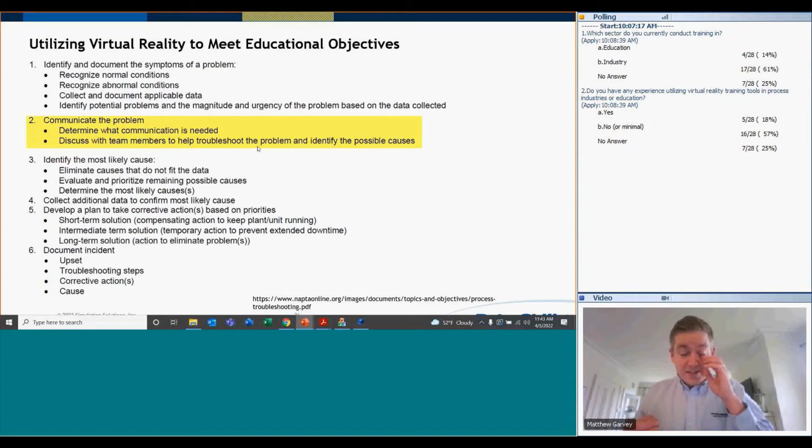The last thing I want to say, since this was geared initially more towards education, I have a little bit of education here. I mentioned the Chem-E sports competition - this is something that's growing for us. Last year we used this system, the absorber and stripper, and we used the VR.

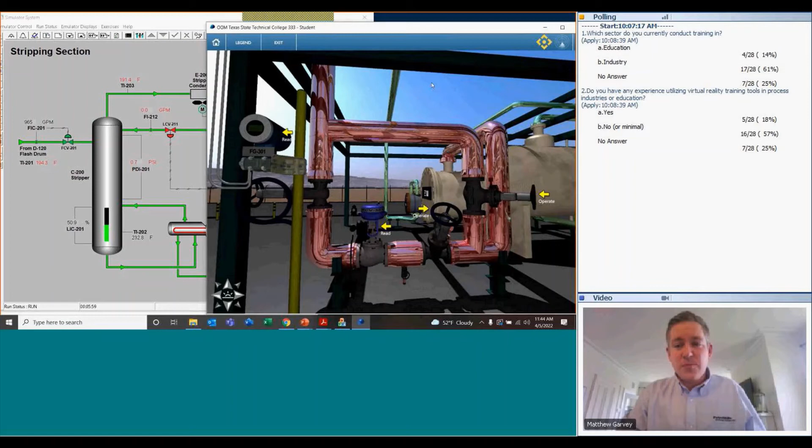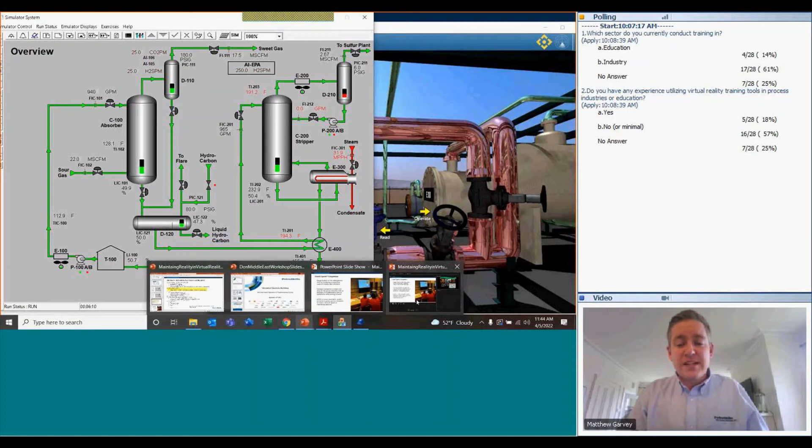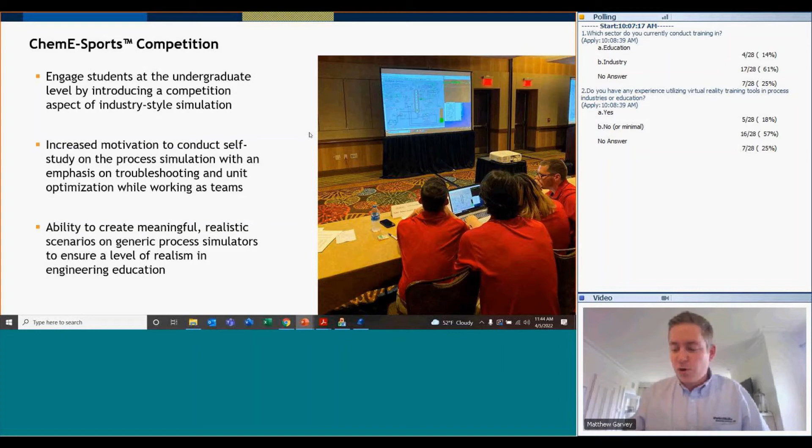They're practicing for weeks ahead, no lie. As much as I like to say keep it realistic, do meaningful training - when I work with operators, they don't want something that's like a video game. But at the education level, this VR, I'd be pulling the wool over my eyes if I said it's not attractive to younger people. With this type of training, we get more and more teams each year competing. It's been quite a fun project.

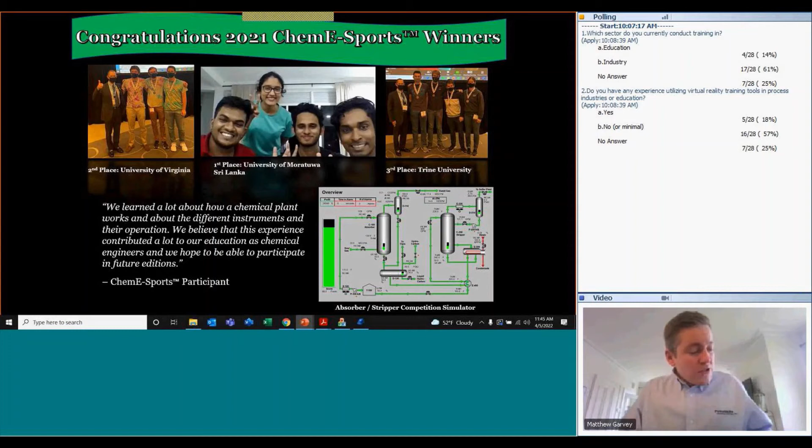I know I only showed two examples there, but I just want to give you more of an idea of the overall view of it.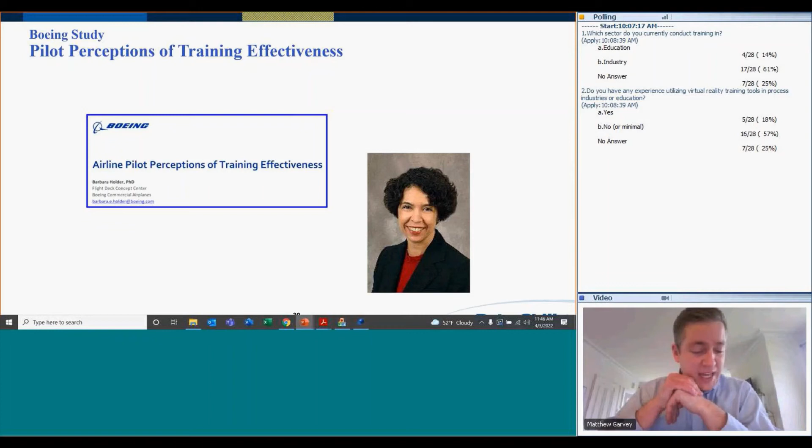The final thoughts I'll give, and I like to end on this - this is a case study from a woman named Barbara Holder at Boeing. When you look at virtual reality or simulator training, I think the airline industry is a great one to look at. The reason is because they almost did the original simulator training. They do it at the highest level today, and there's quite a bit of data there.

This was a study, and the reason I show it is I'll get to the punchline - anytime a pilot is going to encounter a new flight management system, imagine autopilot - this is your advanced process control in the plant. Anytime they're going to fly an aircraft that's been modified or is new, there's mandatory simulator training, and here in the United States, that's regulated by the FAA.

So what they started doing was, let's say the control system changes a bit, you're flying a new type of aircraft, whatever it might be - you go through your week of training on that with simulated exercises. They polled those pilots and said, in the first 6 months of flying your aircraft, did you encounter a situation where you had difficulty performing particular tasks in the new FMS?

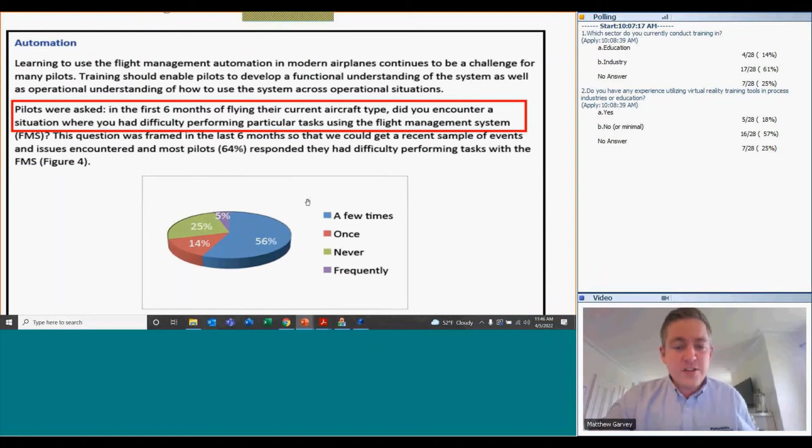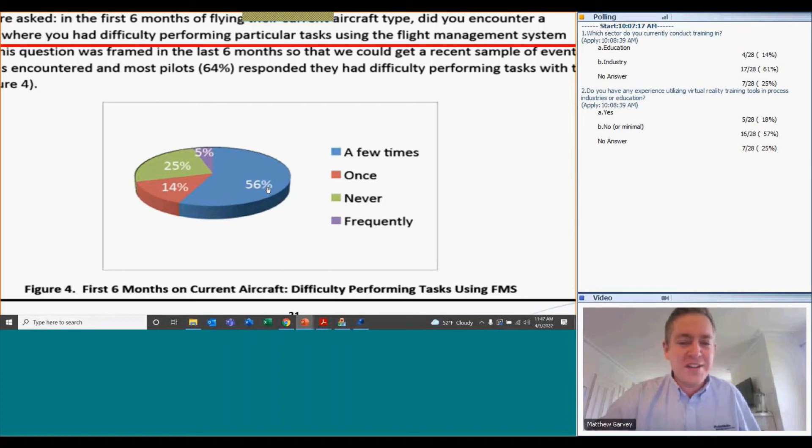So this is after the training. Did the pilots have a difficult time performing tasks using that advanced process control or flight management system? The results are a bit staggering. A few times when they're in the air, they had difficulty. It's not really great to hear from someone that flies quite a bit. Only 25% said never. But I think what's more interesting is Boeing did a whole study on this. Remember, these simulators they're using are multi-million dollars. They fly exactly like the plane.

You know, the tool I happen to be showing is somewhat like the plant, right? But this isn't your exact plant. You could go get a VR that's your exact plant. But these simulators are the exact plane.

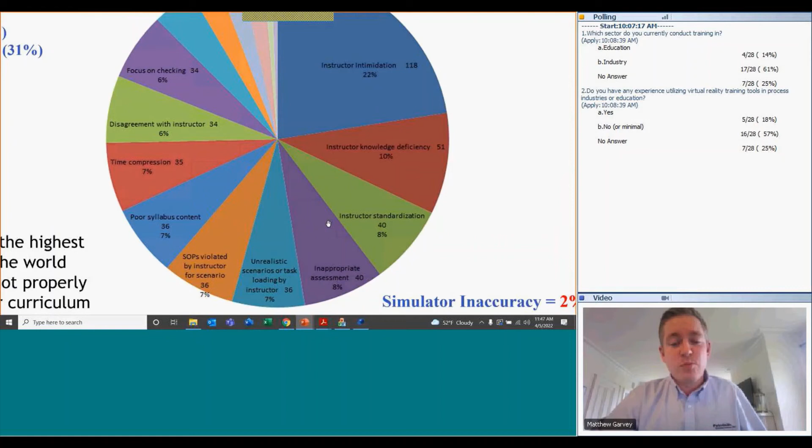And when they polled the trainees, the pilots, they said, what were your negative experiences? And the simulator inaccuracy, what they were using was only 2%. Where they found negative experiences were with the instructors, the course content, or the delivery of the course. So these are things like inappropriate assessment, unrealistic scenarios, SOPs violated by instructor intimidation, et cetera. You can see, and I'll send the slides, but to group them together, it just, when I saw this, it brings to light that you could spend $1, $2, $5 million on a tool.

But our pitch, especially it's very aligned with what PetroSkills' goals, just our company as a whole, is yes, the tools are important, but the way you actually deliver this, who's delivering it, what are the structures, what are the objectives, I think are always the most important point. So I just like to end that when you're looking at virtual reality training, you can have a whole different discussion about here's the different types, here's where these types are at a higher level, here's the cost benefit analysis. But I think my focus was, each company is going to start employing some virtual reality. And I would just like to say, as you begin doing that, just remember that the content, the delivery, and the instructors, from a training perspective, is, in my mind, just as important as the tool itself.

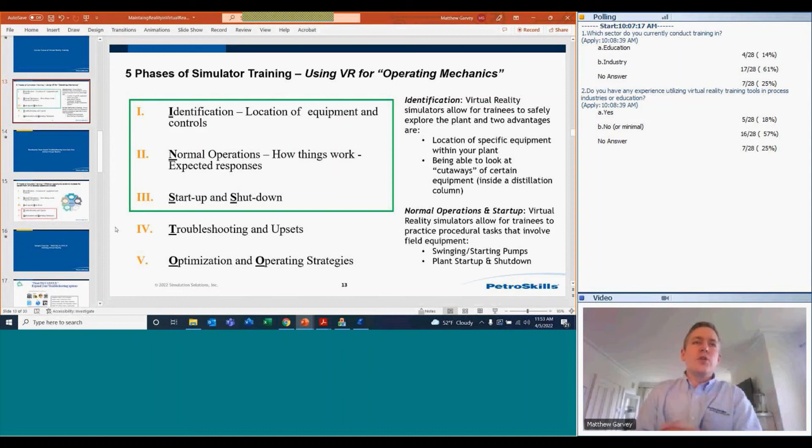I think I know the term, but please correct me if I'm wrong. My idea of a digital twin is you either have a simulator or an actual process, and so you have some sort of process or P&ID that's your process out in the field. And then the digital twin would basically be this part, except it looks identical to your plant. I'm not sure if there's a way to confirm that, if that's what was meant there. If not, I'll keep working off that assumption. I'm sorry, Clay, do you mind repeating just the last part of that question, just because I got hung up on the term?

Sure, yeah. It just asks, how would a digital twin fit with the simulator and VR? Okay, so I don't do much training on what I would call a custom simulator, the digital twin. And it's not because I don't think they're valuable tools, I just haven't had that experience.

If it's anything like the custom OTSs, the ones you get from your controls providers and things like that, I would just be wary of making the investment of that digital twin that you internally are going to support. Because if it's truly a digital twin, and I really hope I'm not getting the phrase wrong, as you make expansions to your site, as you change different control schemes, as you do this, are you upkeeping the digital twin at the same time? So that it truly is a living, breathing replication of your plant.

There's some teams that do this, some operating companies that are able to do this with their simulators, and they have great results. It's just that the company makes the decision, makes the investment - we are going to have a simulator team. Not to throw names out there, but like BP has a simulator team, and they have OTS specialists, and they upkeep their custom simulators, and I'm sure they are upkeeping their VR. So what I would say, even though I'm not involved with that, I do think that's the highest level you can get with these.

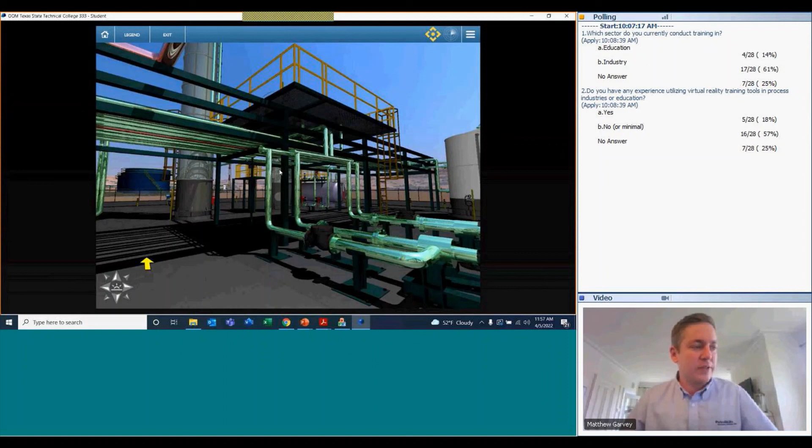Is it scenario-based, meaning I want to cover these 5 scenarios, or do you want something that's completely free-form so you wouldn't be able to go through everything? That's a world I've lived in quite a bit the last 6 months. I'd be happy to give you a call, get some quick information from you, and give you a couple recommended providers that we hope to continue partnerships with. I just don't want to throw one name out there because I'd like a little more information about the project itself.

No, it makes sense, we can follow up afterwards. And then this is the last question I've got - this is kind of last call for if anyone wants to sneak any questions in before we wrap up. It says, how do you approach evaluation or grading on a VR application like this?

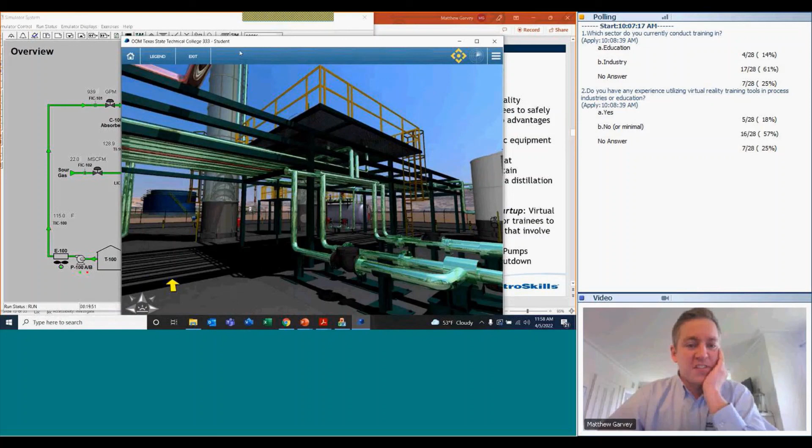Sure, yeah, that's a good point. That's something that'll come up in education quite a bit. So what I'll see on systems, like for example, this system I use, it keeps a log of every action done both from the console over here as well as from the field. So after a training exercise, you could actually have both parties save, and then go through and apply some sort of metrics to this.

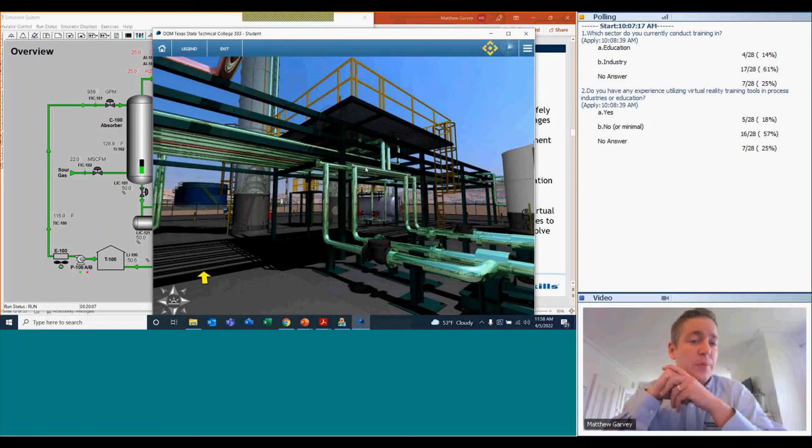I believe some of the more advanced VR systems may even have real-time feedback to trainees. What I mean is if it's scenario-based and they're going through lockout, tagout, and if step C is done before step B, it might flash them a warning - that's real time. The other approach, how I currently do it, is saving the exercises and then applying some sort of automatic grading, looking at deviation of set points, sequence of steps, things like this.

Quite honestly, for industry, I do a lot of instructor-led training. Outside of education, my training is instructor-led, so small class sizes, and we're giving feedback automatically, sitting over the shoulder and doing things like that. But the tools - normally the limitation is not the grading, there's some neat things out there. But it's certainly a consideration if you're looking at different potential VR partners - how much evaluation do you plan on doing, and is the current vendor able to do that?